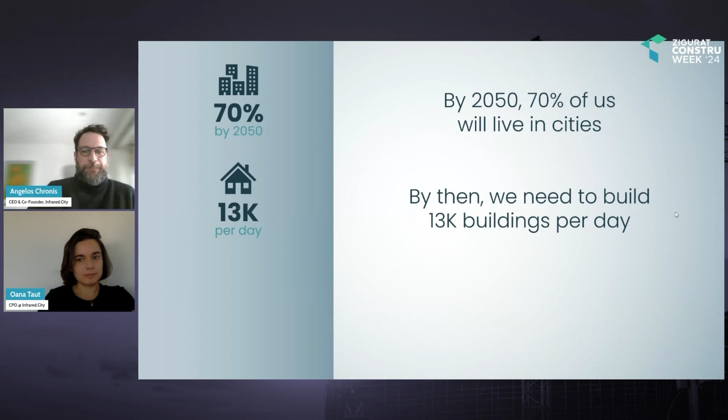So the problem is a very real one, and we need to address it from all sides, but specifically from the urban development side. We all know urbanization rates are not stopping. By 2050, 70% of us are expected to live in cities, and Autodesk says by then we have to build 13,000 buildings per day. Even taking the more optimistic calculations, we are still one of the largest contributors to climate change. More than 40% of climate change is attributed to the built environment, and more than 60% of carbon emissions are generated in cities. So we definitely need to find ways to understand the impact that our designs, our plans, our urban and city plans and our buildings have on the environment, and vice versa.

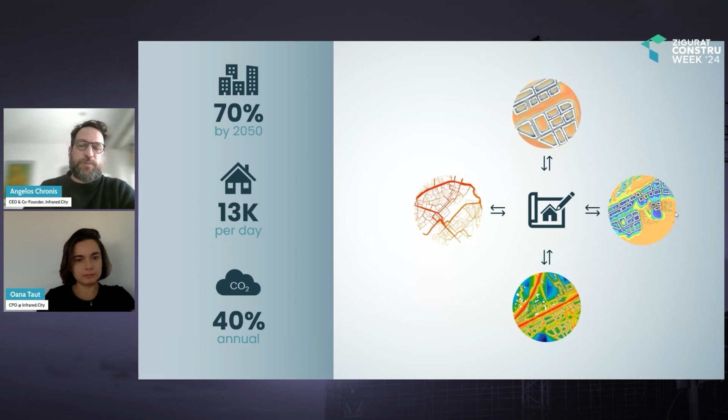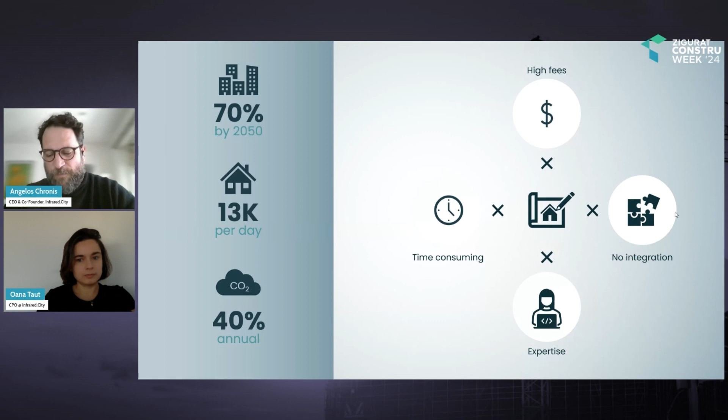What will happen to our urban environments and to our cities from the climate? To answer that, we need very complex, time-consuming climate simulations. Climate simulations are very expensive, they're very difficult to integrate into design, and simulation software is normally very inaccessible. So, in a nutshell, that's what infrared.city is trying to do. We're trying to make climate simulations accessible using artificial intelligence.

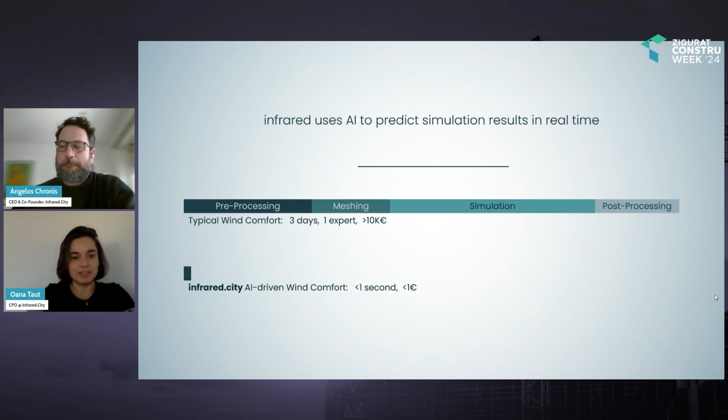Infrared uses AI to predict climate simulations in real time. While typical wind comfort simulations, which are very important to understand the effect of building massings in the built environment, may take up to three days to produce by an expert and have a very steep cost associated with it, with infrared you can generate AI-driven, AI-predicted simulations in under a second.

The reason for using this inside the design process is already quite clear.

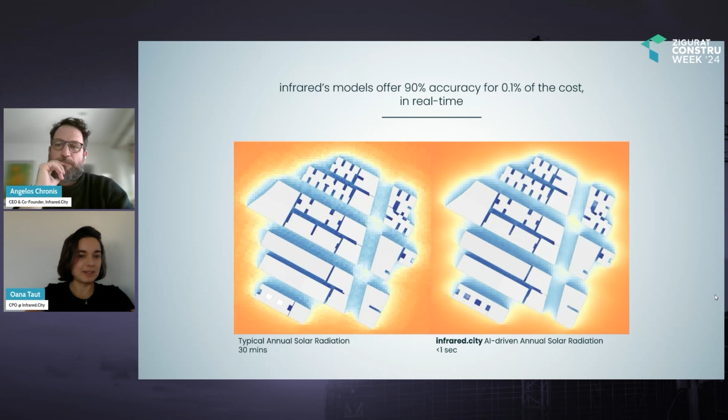So how do we achieve this? We train deep learning models with thousands of simulation results that try to capture a very wide variety of building massings that are possible within a city. With these trained models, we can then predict simulations for never-before-seen designs.

But it's not all about our AI models and the prediction of simulations. What actually sets us apart is increasing accessibility. For this, we are approaching it with an open integration framework. Our predictions currently are available through Cloud App, CAD plugins, and APIs.

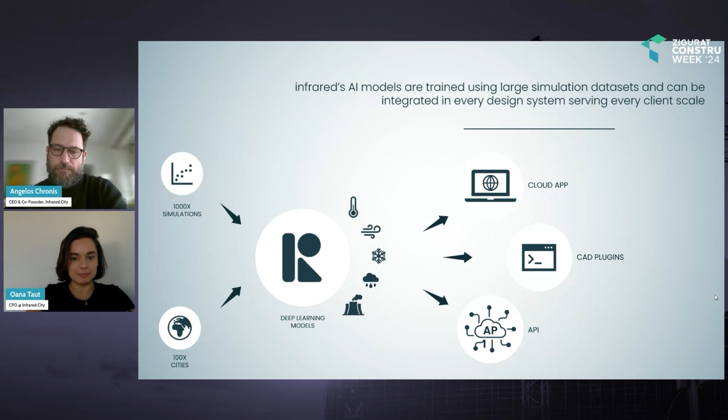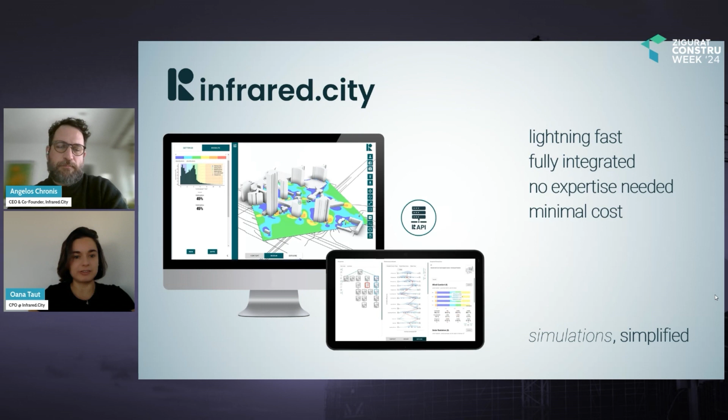Infrared is currently a working platform. It's fast, integrated, and doesn't require expertise to use.

On the platform currently, you can predict wind speed and wind comfort simulations, as well as solar radiation and insolation hours. We are also adding more services required for the built environment in the next development.

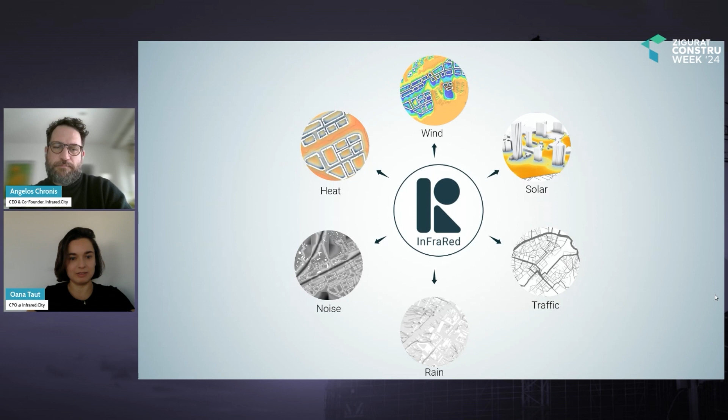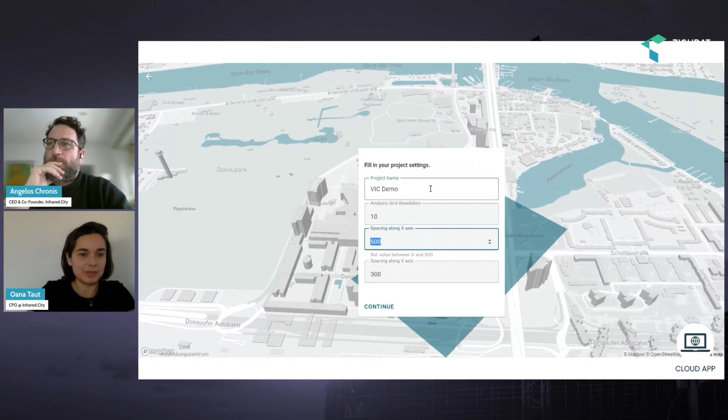Extremely accessible, the Cloud App allows users to quickly create a project by adding their information and project location. They can instantly retrieve data that is available about the context of the design.

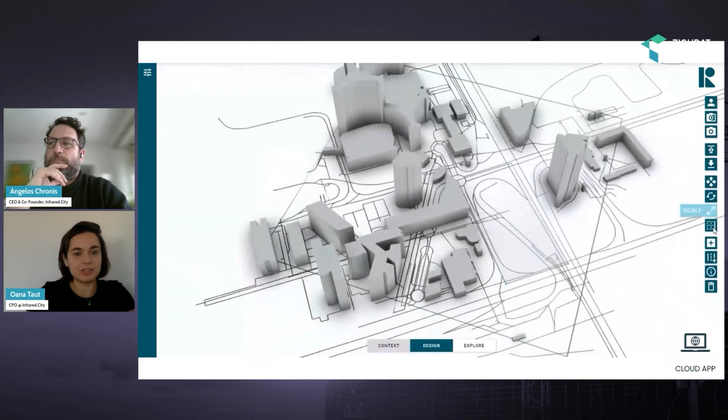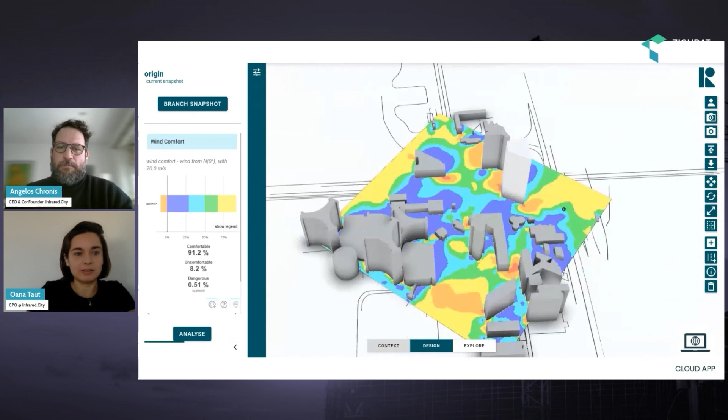They have a set of tools on the app to set up their site, set up the simulation requirements, and begin drawing or creating a building instantly. They can also import designs from other apps or design platforms, and in almost real time, the wind simulations or predictions are delivered back to the user.

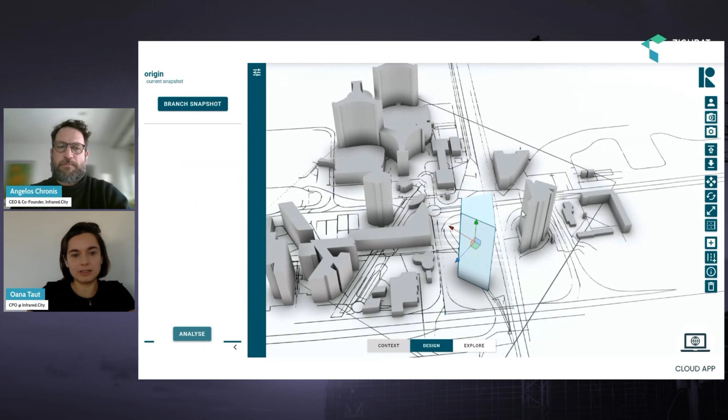If a design change is necessary based on the simulation results, the same simulation can be re-evaluated with the new design change, and it's possible to check whether improvements have been made, or how to inform improvements in the design process. So it's very easy to imagine how, by increasing the speed, we actually enable simulations to be used within the design process.

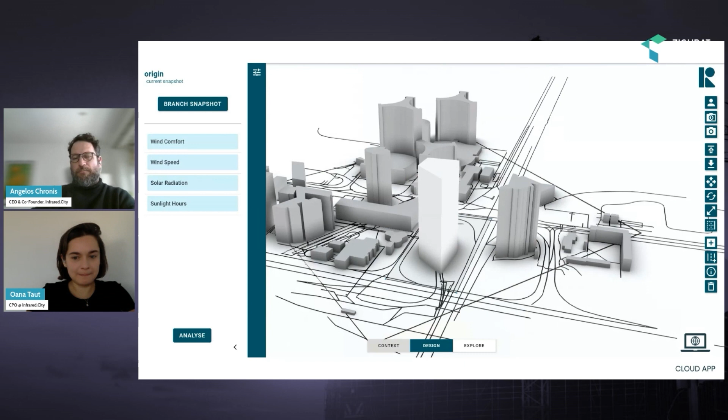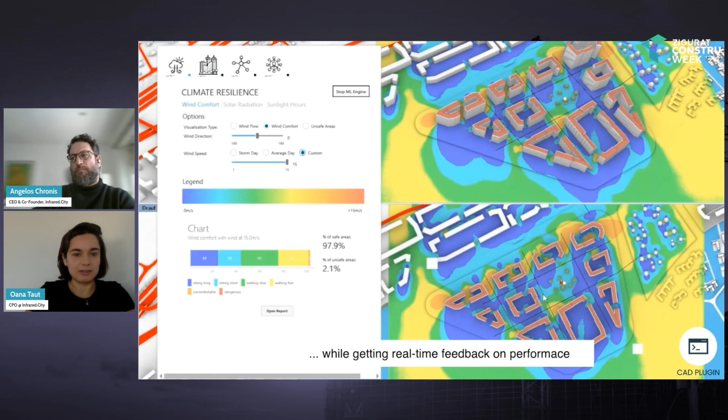Next, we have the Grasshopper plugin. This allows more advanced users to build internal design generation applications, or to enable existing workflows they may have created internally with simulation results.

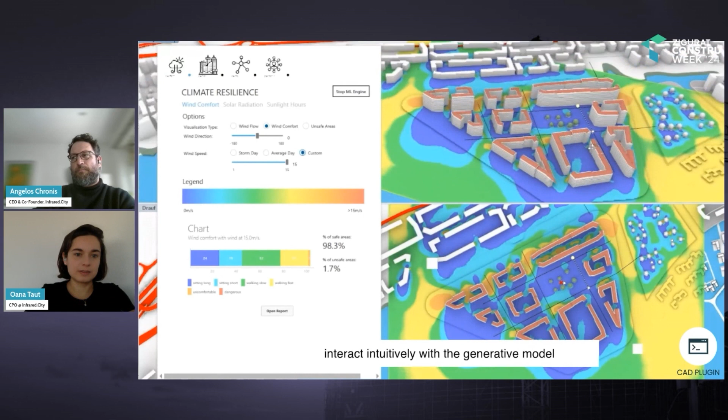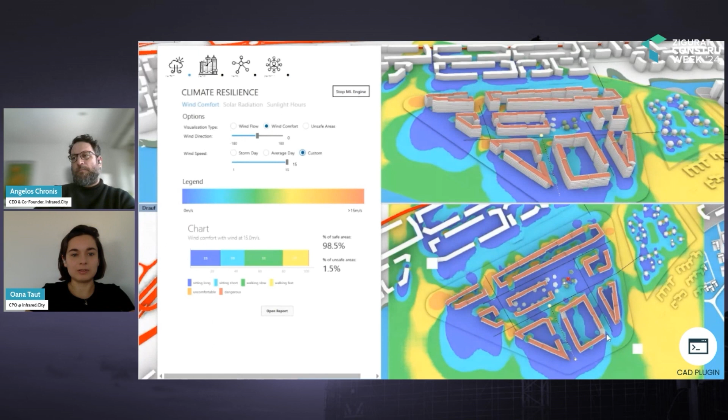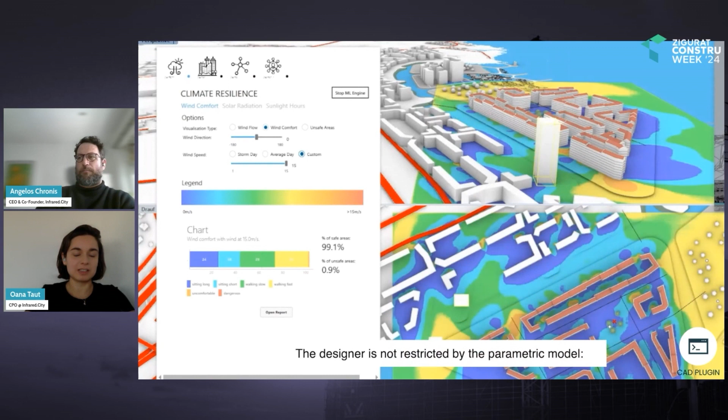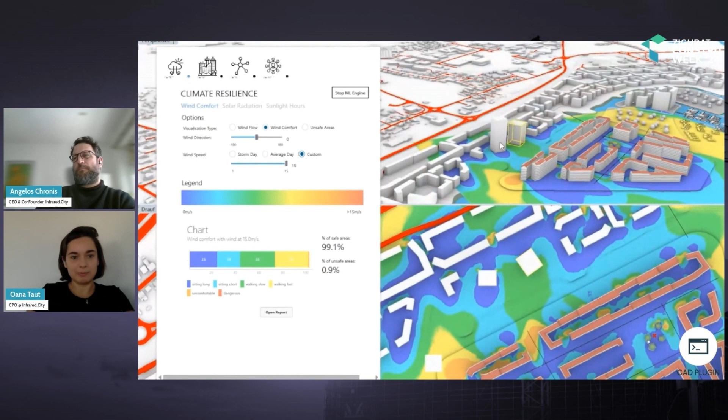So while simulations are part of the available tools that Grasshopper can allow design teams to use, because of the slow computation aspect of some simulations, they are very difficult to use in a generative design workflow. What we can do by embedding infrared in Grasshopper is enable this sort of simulation, with the use of AI, to be embedded into generative, fast design processes.

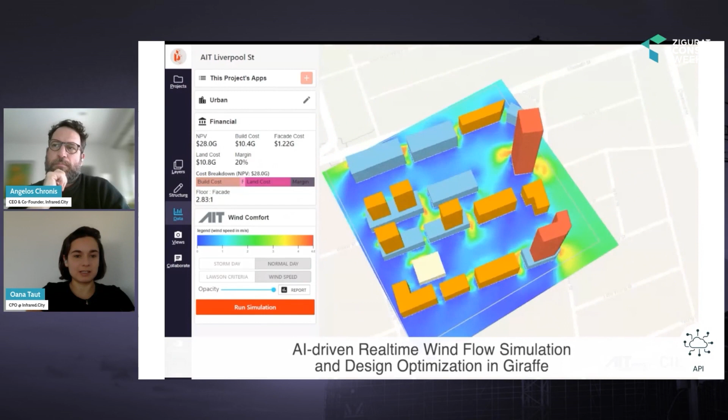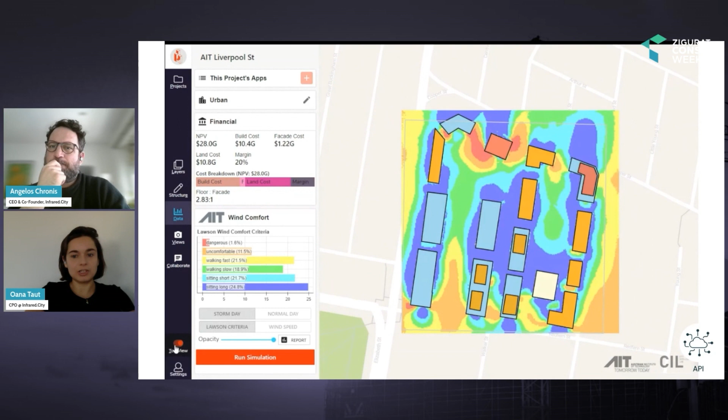Finally, by accessing our API, users can build and deliver custom applications to access the simulation results. Here you can see how Giraffe, a very popular design generation and testing application, included simulation results as a service directly on their own platform.

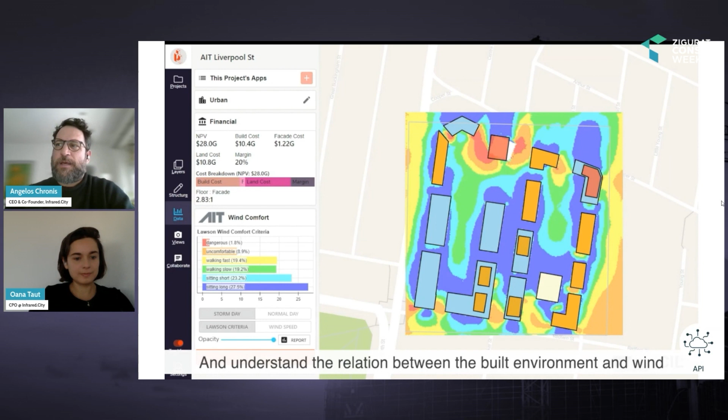In a nutshell, what infrared allows us to do is really serve simulations in every design platform, in every design system, through this open integration approach, but at the same time deliver real-time and accurate enough climate impact simulations for design processes.

What I'm going to show next is essentially a project we've done as a collaboration between infrared cities models and AI-driven simulation capabilities, with Link Architecture as a design partner. All of this was happening during infrared's time within the Austrian Institute of Technology and the City Intelligence Lab.

So infrared is a spin-off of AIT, and this project happened within AIT. What we can see in this project is how parametric design and fast iterative design changes are combined with microclimate, accessibility, and other environmental factors to assess in real time and in an interactive way the performance of a project.

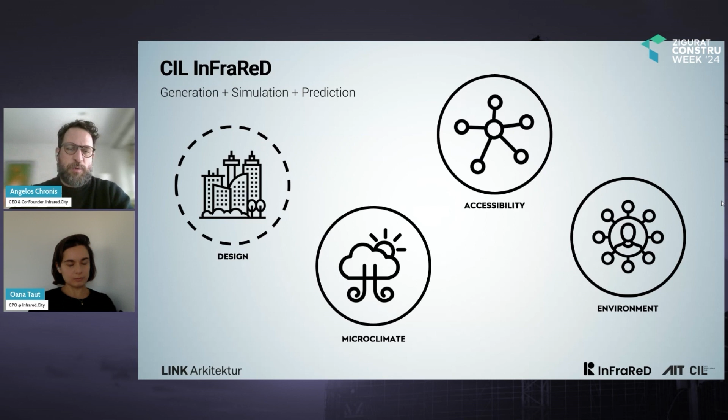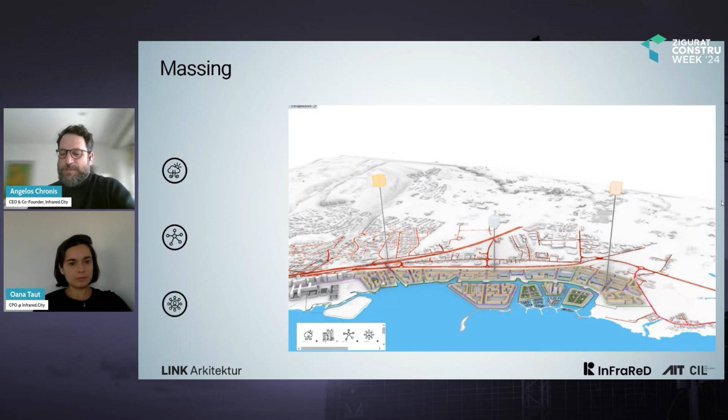In this case, we're talking about the waterfront redevelopment. What we can see here is essentially a generative design, parametric design module that allows you very quickly to play with street layouts, to add and remove mass, and to generate different options for the development of this area.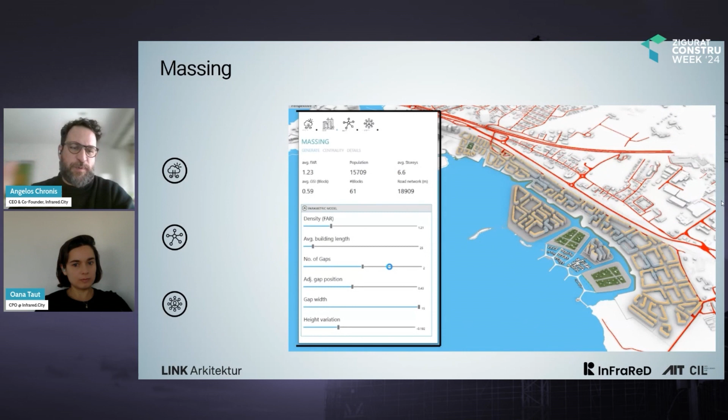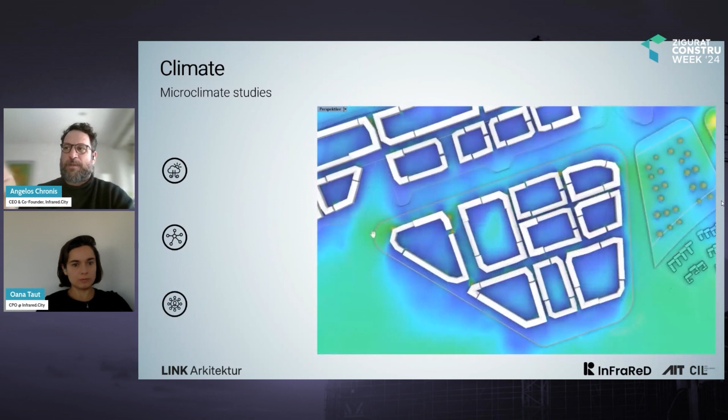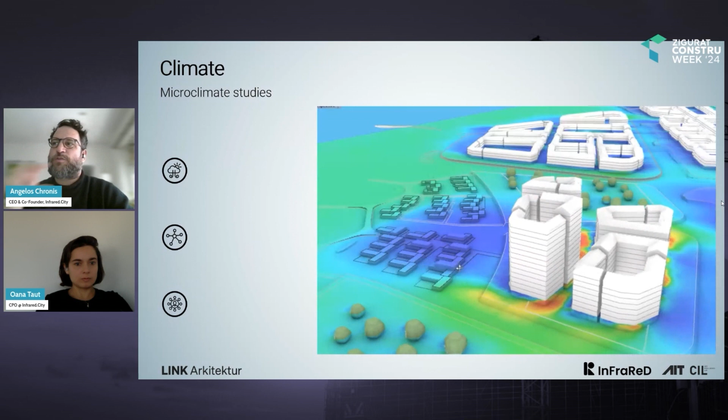These fast iterative design changes don't come just with metrics about the form, but also with metrics about the climate. Every time a design change happens, the AI models of Infrared.City are triggered automatically to generate immediate microclimate analysis of every new design. So any design change carries with it enough performance information to be assessed in times that would previously be inconceivable.

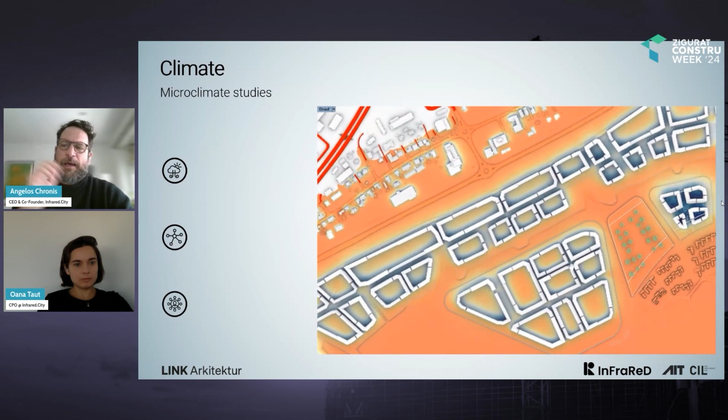Here's a quick example of moving a park around, which we saw a little earlier when I was describing the Grasshopper integration. We just select a point within this island massing option to move the park around. This is a real-time recording, and we can see on the left side the wind comfort charts being directly updated.

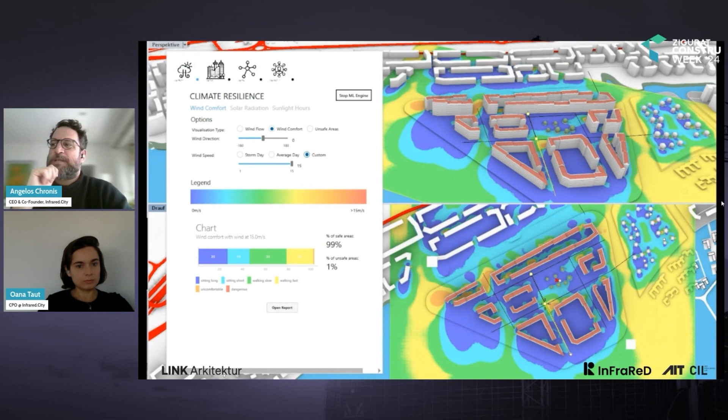Moving a street layout and cutting off a street immediately triggers a wind comfort simulation. We can see how these large series of buildings shelter the area from high winds — this is Norway, a coastal area with very high winds — and how it shelters this small square park that we introduce.

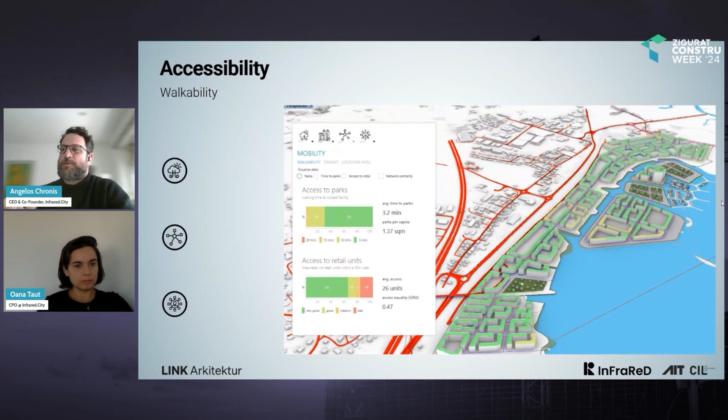So every time a design change happens, a simulation is triggered. But it's not only about wind comfort. In this project, we've also combined it with accessibility and mobility analysis, which isn't something Infrared currently offers, but it's something we'll probably offer in the future.

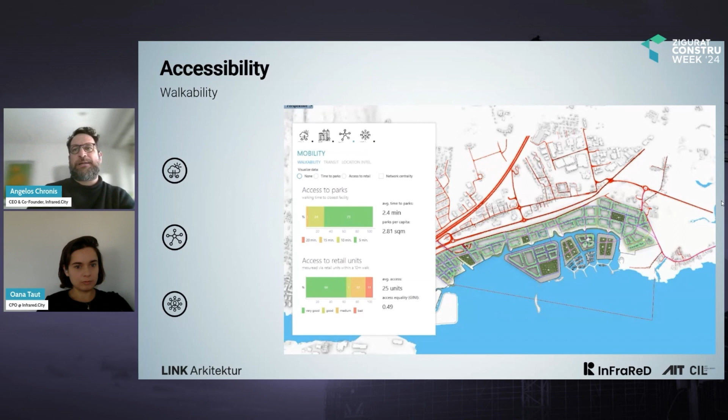Here you can see where parks are located and how access to those parks is calculated. For every design change, every time we move the park around, we can calculate the time it takes to reach these parks from every unit in this development.

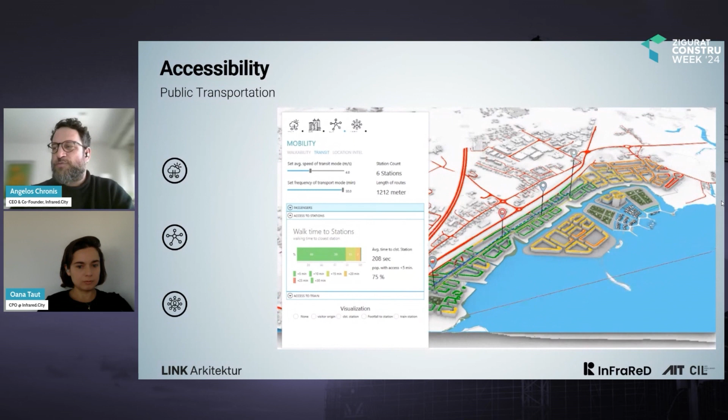At the same time, we can add stations or a tram line or any other transport line and see accessibility and catchment areas of these stations. These models are currently available from the Austrian Institute of Technology and can be integrated directly with infrared city. You can even look at footfall of different bridges connecting these stations, passenger potentials, or walking time to stations from each unit in the area.

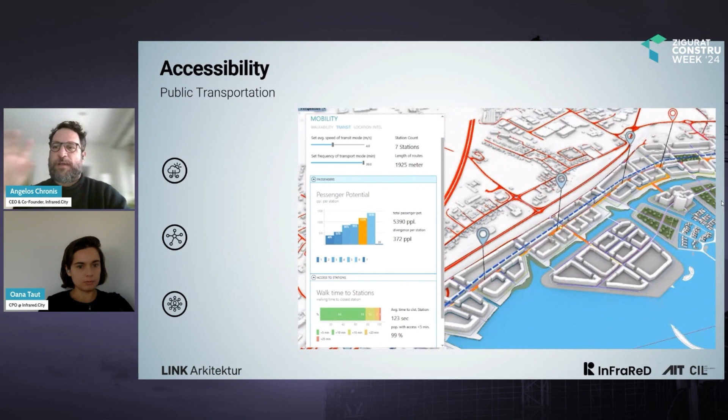On top of that, you can also do things like noise simulations, which is something we're going to introduce very soon in infrared city as an AI model. In this case it's not really AI-driven yet, but we're building that too — you can see every unit's exposure to high noise levels and what percentage of the population is exposed.

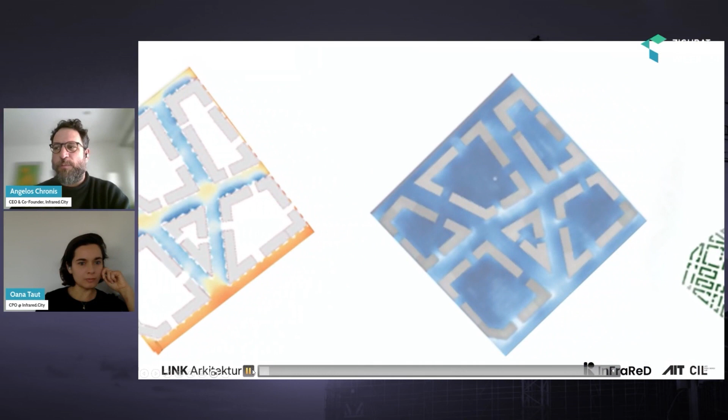This idea of holistic, real-time analysis of designs really changes the way we interact with massing in this relatively large urban area. Further to this iterative manual search for a performative solution, which was also previously unattainable, we can also search a whole design space.

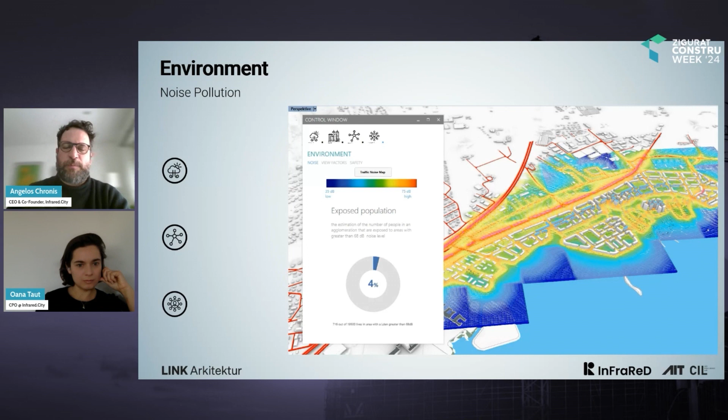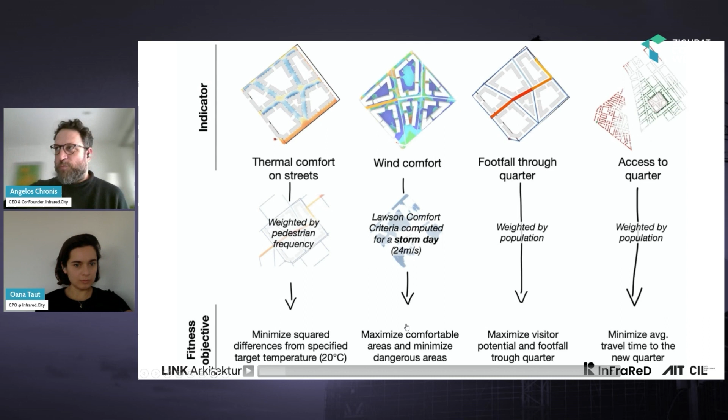Further to this iterative manual search for a performative solution by adjusting design components, we can also explore using generative design a wealth of design options. I'll show a project where we searched for the best solution using four fundamental performance metrics: thermal comfort, wind comfort, footfall or accessibility through the quarter, and access to quarters outside of our quarter at hand.

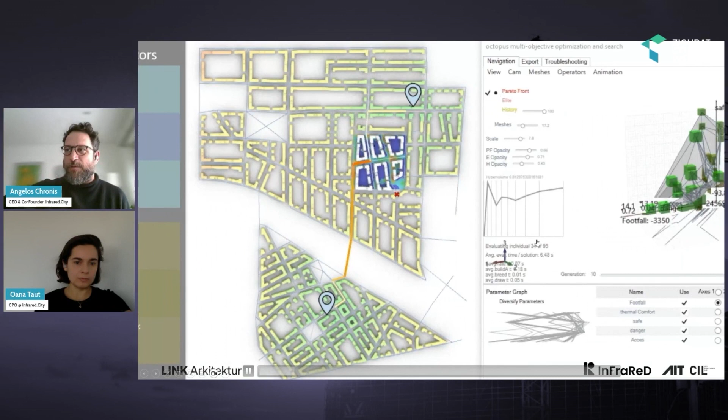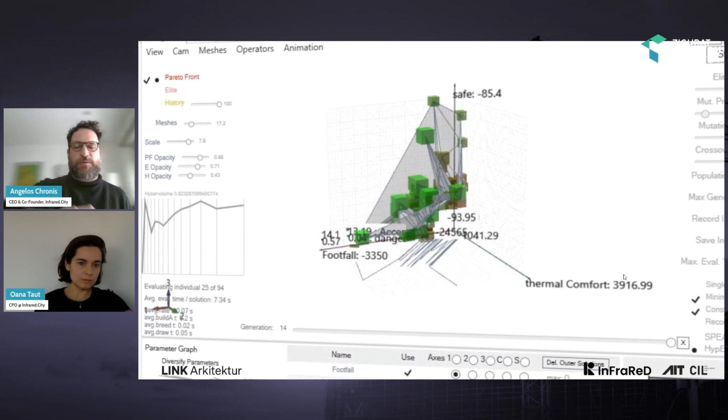In this case, what we can do is run 1,000 potential scenarios, potential design options, and not just create the geometry for each, but also generate the performance of each one of these options.

And then that means that we can really select the best options, take them to the design table, and continue manually interacting with them. So this idea of human to AI interaction is what's very interesting here. You can take that design that's very performative, bringing it back to the design table, and start saying, I'm going to continue designing from this very performative base.

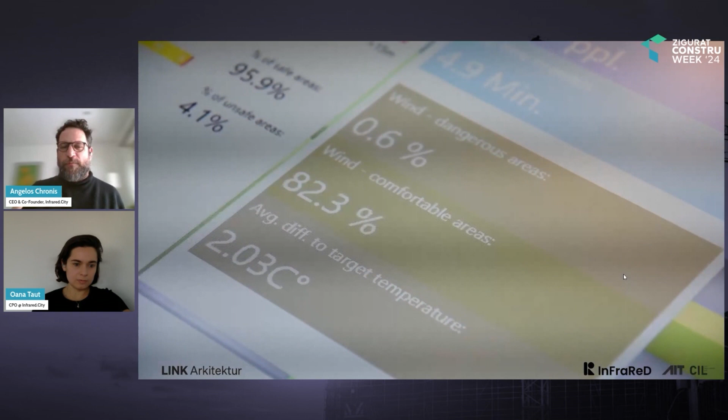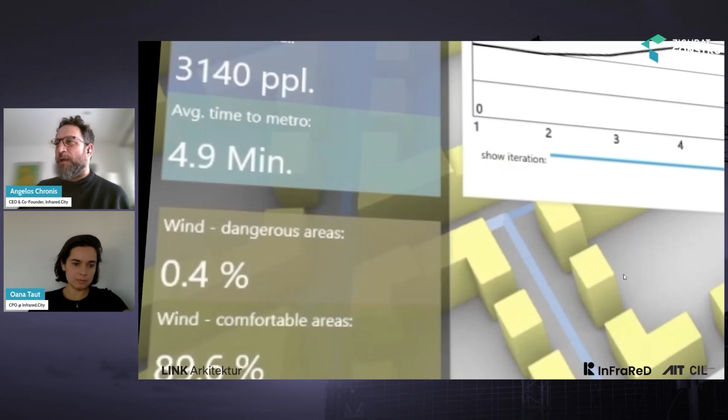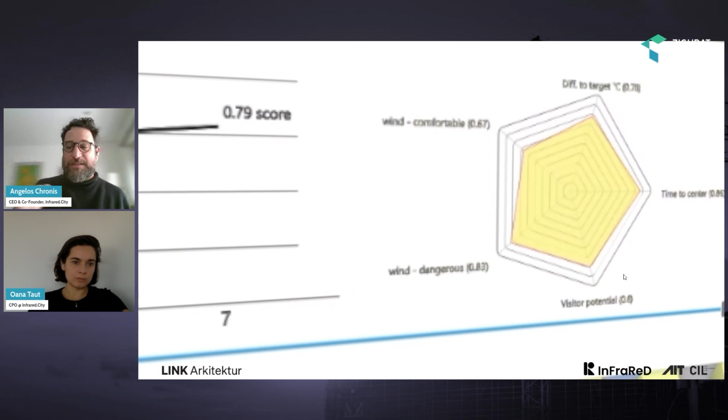In this case, what we say is, let's find where we should put a tower. And that tower can actually be searching for its own location by checking the wind comfort, so that it maximizes the wind comfort but also does not affect the circulation of that quarter. That's essentially something that was not previously attainable, because if you were to run all of these different analyses, it could take you months, while with InFraReD it takes you less than a day.

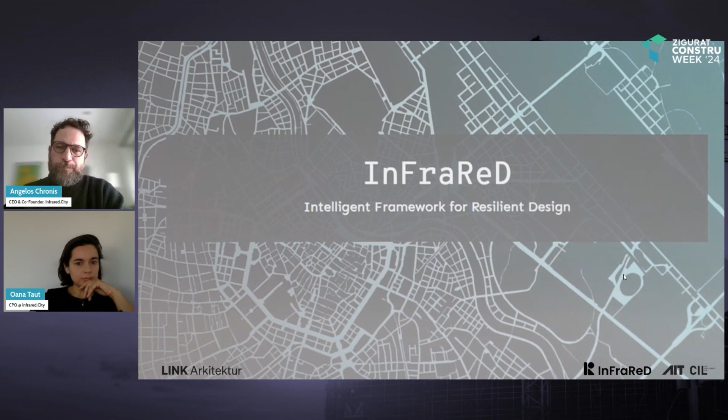So to conclude, essentially what InFraReD can deliver is real-time performance assessment, which revolutionizes the way we use simulation in design. Instead of having certain assumptions and waiting for the simulation to validate those assumptions, we can actually design with simulation, design with comfort, something that previously was not possible. On that note, that concludes the presentation.

A really fascinating insight, and it's great to see some real world examples. For me, I think we've seen the devastation that Mother Nature, the climate can cause. I think you've seen that in your home region in Greece. So I think what you're doing here is really, really valuable, and it has an impact so wide reaching. I mean, I've seen some fantastic stuff. You were saying 90% accuracy for 1% of cost. You're talking about decision making, getting results, real time changes, and seeing what that has on our designs.

But I guess the question I want to ask you is, what does all this mean for designers, architects, and engineers? And do you think there's a skills gap that we maybe need to address to adopt some of these processes and technologies?